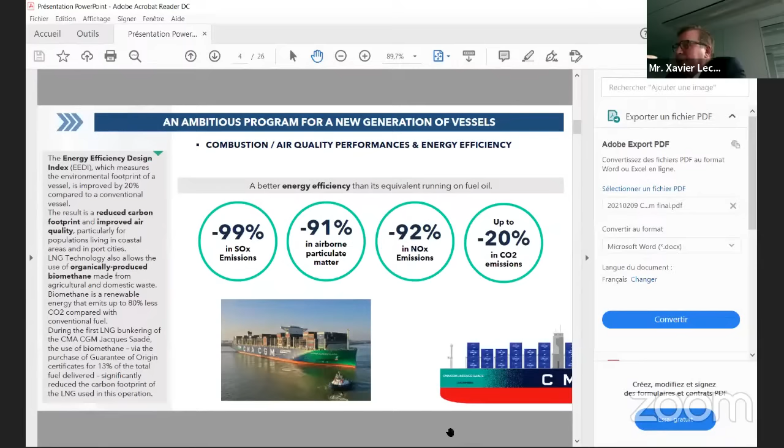The objective of the program was to reduce the impact of our activity by 20% on CO2, 92% on NOx, 91% on particulates, and 99% on SOx. We will see where we stand as we now have the first feedback in operation. This is quite an ambitious program, as you can see. We are close to half of it - there will be 26 ships in operation by 2022.

There's different types of ships - I will not go through the details of the characteristics. Just for you to know, there's a series of 1,400 TEU, a series of 14,000 TEU, and a series of 23,000 TEU. So far we have delivered 12 ships. There are 14 ships still under construction, which will be delivered through 2021 and 2022. At the end, we will have 26 vessels in operation in 2022, and there are 4 shipyards involved.

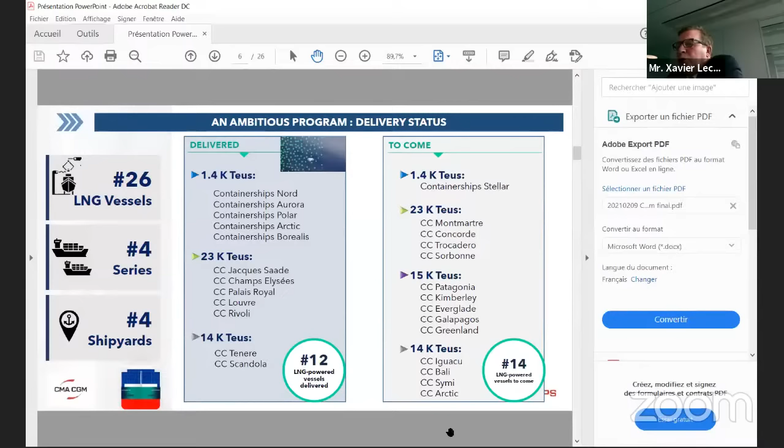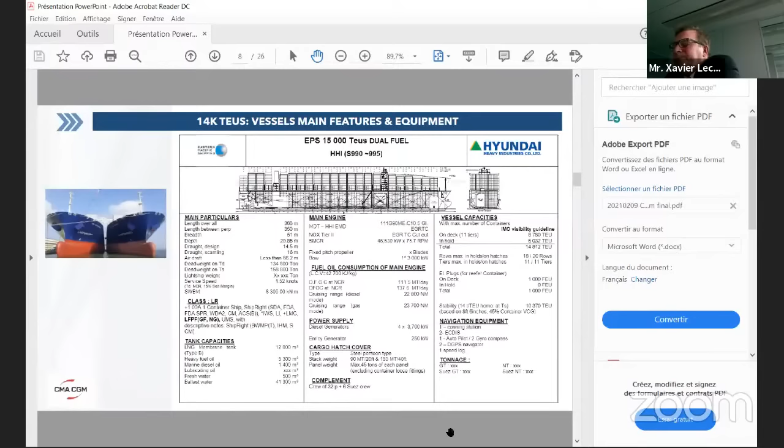I've put in, just for information for those who might be interested, the different characteristics - I will not go through all of them, just a few words. What is interesting about this program is we have most of the technology available on board. We have Type C, we have Type B, we have Mark III technology, and for the engine solution, the big players are all on this program: WinGD, MAN, and Wärtsilä. That gives us a good panel regarding the feedback I can share with you today.

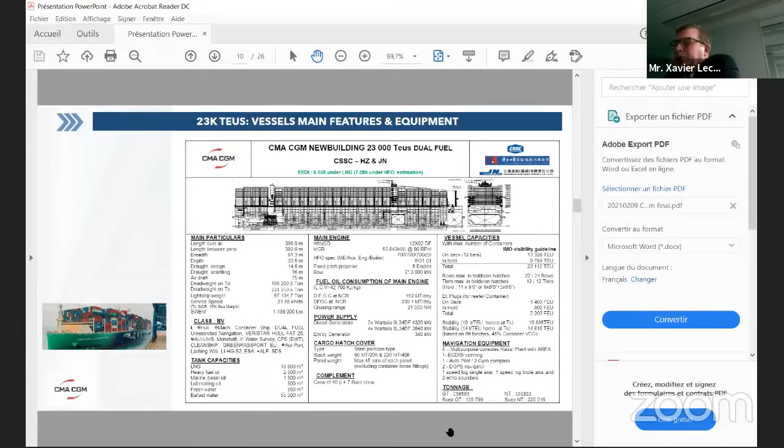We have all the solutions in operation, and of course we are measuring the performance of that program. If I stick to the main program, which is the 23K, the largest LNG-powered vessel ever built - this has been quite an extensive program of 7 years of research and development. Of course there were key partners, and I don't think we can solve the environmental problem without very large collaboration and international collaboration. That was the case on this program.

So I insist on the fact that the supply chain in this challenge we are all facing is really key. So in terms of results now, I think what is most important is where do we stand in results.

So if we look at the Energy Efficiency Design Index, on the 23K, we are reaching 6.32. And we feel that there are further improvements with alternators on the main shaft line. We can reach 6.09, 6.54 for the 15 DF K, and 16.41 on the 1,400 TEU. So we see that we already reach through that technology the

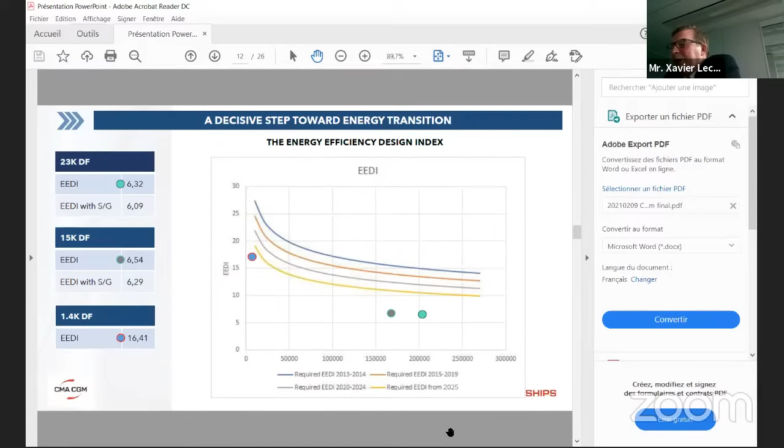So if we look at the pathway, as I mentioned, we've already reached with this delivery the 2030 objective. There's still a way to go to reach the -70, but again we feel that this technology has something like 15 to 20%, which is absolutely not the case of conventional fuel, and I think everyone would agree on that.

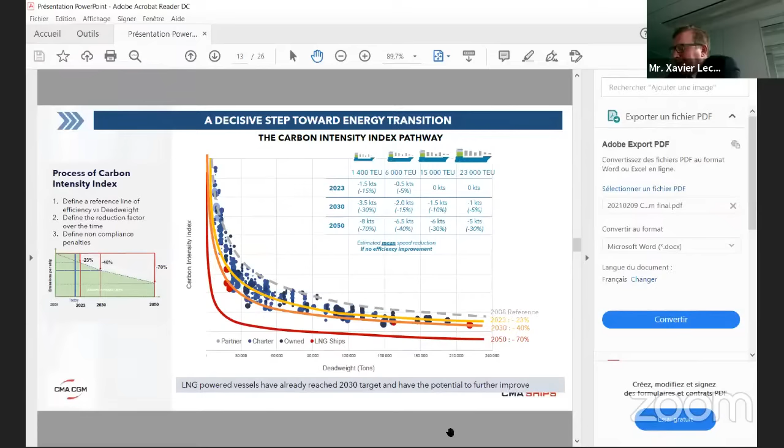So if we look at a very important point which has drawn the attention of all the shipping industry, it is of course the methane slip. I think we should not hide that with this technology there's a methane slip. So we've been measuring that, and what we reached so far is 2 grams of CH4 per kilowatt.

It's the same on an Otto cycle, or a diesel cycle, or very close by. And I think it's very important to measure it, to know where we stand in order to find solutions. And we already have solutions developed with our suppliers. We know what will be the design of the future series of ships to minimize it. And I think our objective is to completely eliminate the CH4.

But not only the technology on board the ship is important, I think the most important is also to work on the supply chain. And we know that the production of LNG is also something which could be further enhanced, not only the ships themselves. So I think we should work on both sides, and we know exactly where we stand on board the ships.

And I want to share in a very transparent way what we measure at this moment on board our ships. In terms of emission, this is quite spectacular, and I think our goal was to minimize CO2 by 20%. You can see in the figure here, which are measured figures on the first trip. The first trip is between Southeast Asia and Holland, where we do a full round trip, and at this moment we are getting 22 to 24% in consumption.

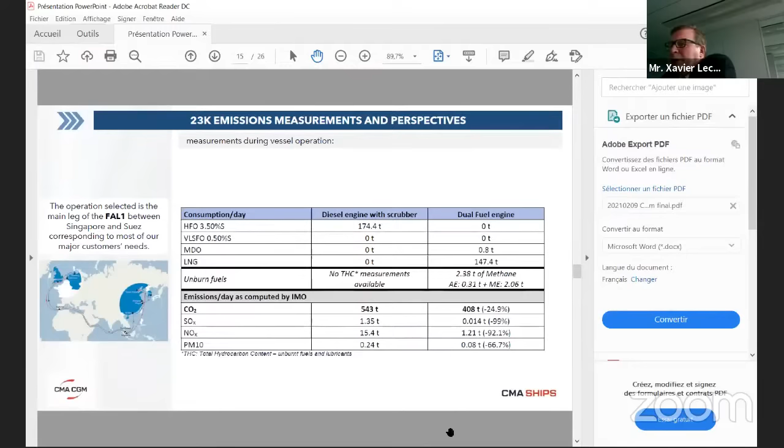If we look just at the figures in terms of consumption, these are real, measured figures, and again, this is available for the whole community. Again, it's quite spectacular. I mean, we are between 22 to 30% in terms of consumption, with of course immediate results on the emissions. So if we look now at the use rate, we have a good backlog now.

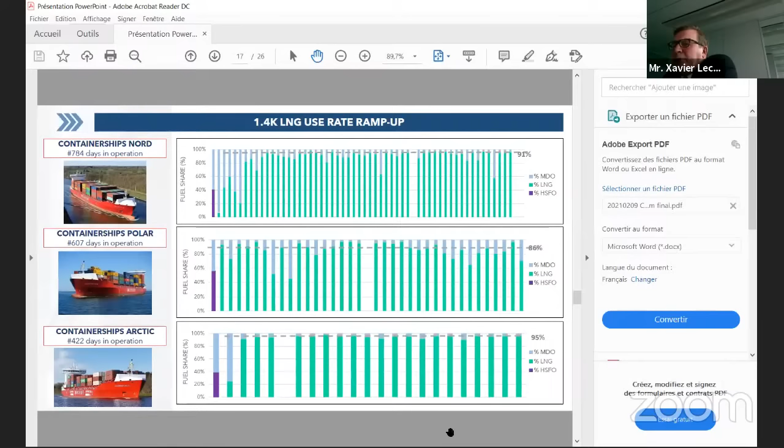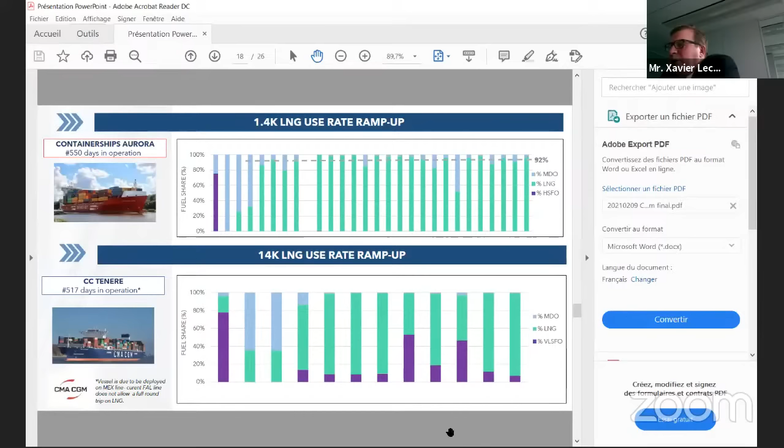784 days in operation for the very first ships. You can see that the use rate is around 91 to 95%. This is on the very first ships which we have operated. And then on the larger ships with our partner, the CC Tenere is not yet significant because she has been positioned, and I know that Mr. Ducot is online as well, on a line where the supply chain is not the best, but it will be solved within the end of the year, as there will be a barge located in Fos.

If we look at the big one, the very first leg we're under fuel because it was not possible to load LNG in China.

And with the very first legs we've done, we reached 96% of use with a very reliable operation on this extra large container ships.

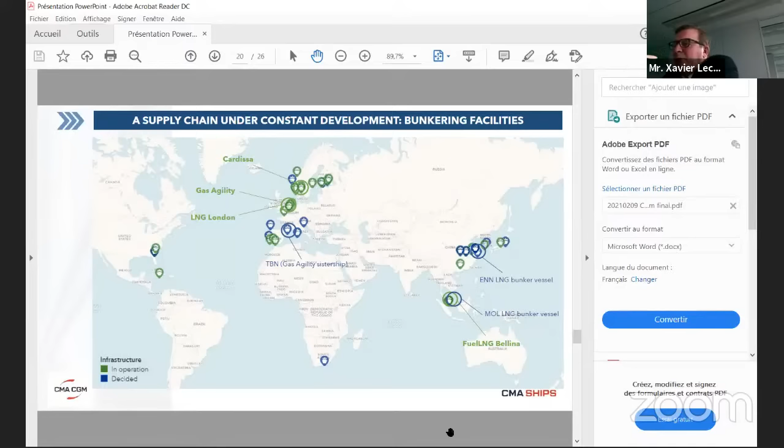Another very important point is the supply chain. We see that the supply chain is developing. The whole program was based on the supply done in Rotterdam with the partnership with Total and Rotterdam Harbour, which was a key partner during that program. We have already one possibility in Singapore now, and we are currently developing south of Europe and China. I feel we are not anymore in a chicken and egg story, as there are many projects of supply barges ongoing. There's 82 barges under construction at this moment. So the supply chain is definitely solved.

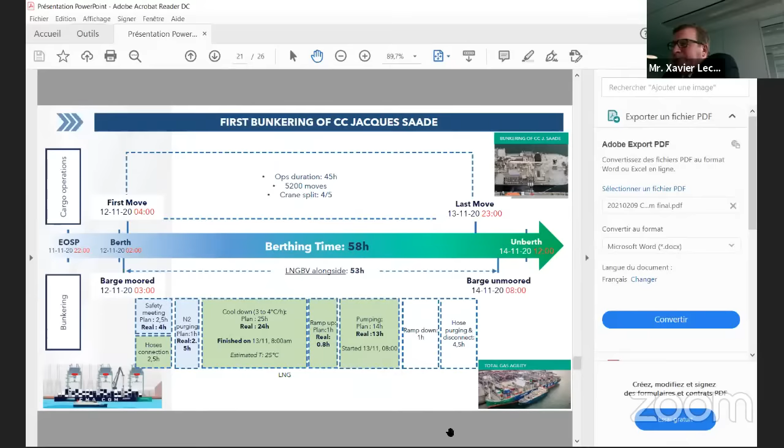If we look at just a few things, because there are many questions regarding bunkering operation: the very first bunkering operation took us 58 hours. Of course it was long, because the tank was not cold. Now we know that with a tank which is cold, it would take us less than 35 hours to bunker 18,600 cubic meters, with absolutely no impact on the operation, because at the same time we are loading and offloading containers. The only limitation we have in a restricted zone is with the reefers. So this is the progress we've been making.

Of course, we are learning on each bunkering. This was seen as a critical operation, and we feel that with the very first experience and the number of bunkerings we've done so far, 145, it's not an issue anymore.

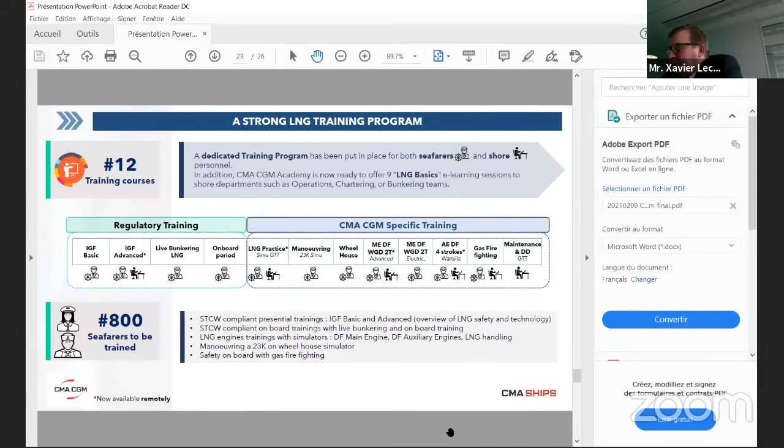Last but not least, the training program. We designed very specific training courses. We have to train 800 seafarers, and of course we have a dedicated training course on that. But this is quite something, and the training facilities for us have been a concern and still remain a concern. I think in Europe this should definitely be increased.

So the main challenges we have had: prototype. Like every prototype, we've been learning every day, but we've reached a point where we feel the operations are safe and reliable, and there's a good way still for improving performance in terms of emission and efficiency. Things like post-combustion, electric load sharing, aerodynamics, hydrodynamic design, heat recovery are still possible on this technology.

And we feel that for the next 20 years there's certainly a significant step towards energy transition. So as a conclusion, and I hope I've kept my 10 minutes, we've been in an innovative and ambitious program. We feel that LNG is an immediate, efficient step for the energy transition. The use rate is increasing daily. We feel there is potential for improvement compared to conventional solutions. Training is a challenge, and we'd like to make sure that in future rules the use of bio LNG will be taken into consideration, because we are already using 13% of what we load on board as bio sources. We definitely know the way will be long, but LNG is a significant step on that path. Thank you very much for your attention.

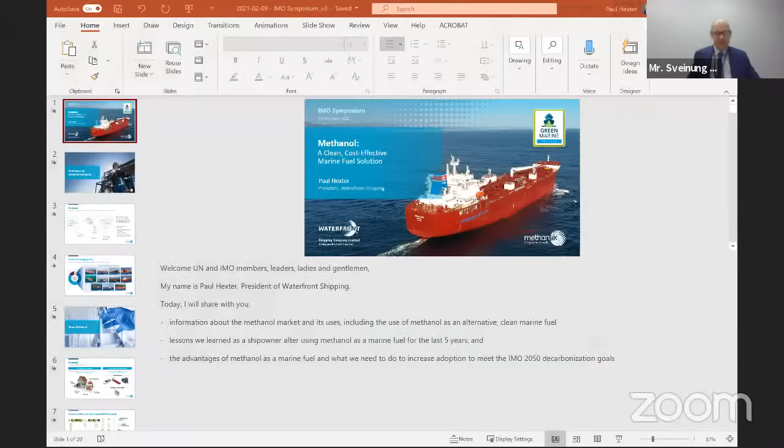Welcome UN and IMO members, leaders, ladies and gentlemen. My name is Paul Hexter, President of Waterfront Shipping. Today I'd like to share information about the methanol market, its uses, including as an alternative clean marine fuel. We'll share lessons learned as a ship owner using methanol as a marine fuel for the last 5 years, the advantages of methanol as a marine fuel, and what we need to do to increase adoption to meet the IMO 2050 decarbonization goals.

First, I'd like to share a little about Methanex Corporation. We're headquartered in Vancouver, Canada, with production sites in Canada, Chile, Egypt, New Zealand, the United States, and Trinidad. We're the world's largest producer and supplier of methanol, servicing growing demand around the globe. Methanol is one of the top traded chemicals globally, and has a well-established and far-reaching global supply chain in place today.

Waterfront Shipping, a wholly owned subsidiary of Methanex, is a global marine transportation company specializing in the safe, responsible, and reliable transportation of bulk chemicals and clean petroleum products to major international markets. Today we operate an extensive fleet of ocean tankers from 3,000 to 50,000 deadweight, forming a seamless network to move methanol around the globe. As at the end of 2020, we operate the world's largest methanol-powered fleet with 11 vessels, and have recently ordered a further 8, which by 2023 will increase our methanol representation to around 60% of our long-term fleet.

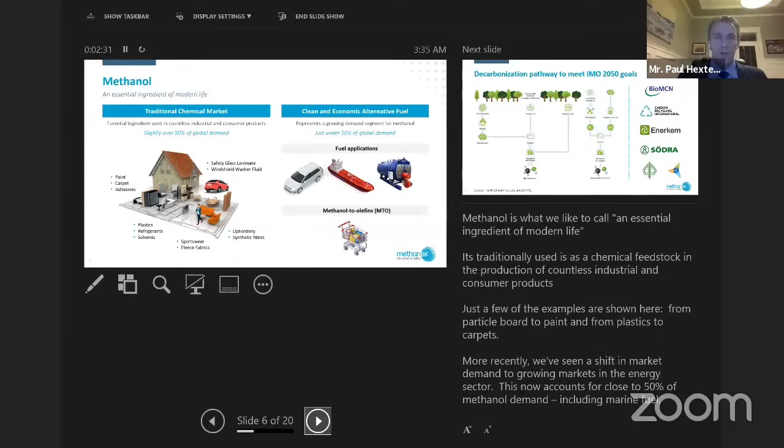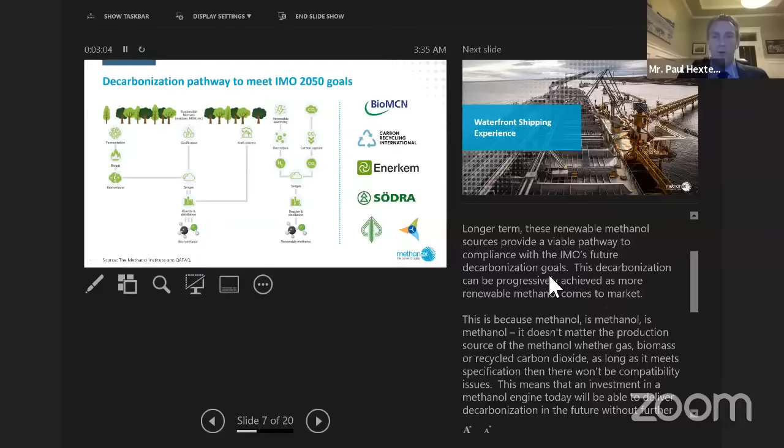Methanol is most commonly produced on a commercial scale from natural gas. However, it can be produced from many renewable sources, such as biomass, recycled carbon, and recycled carbon dioxide, and has the potential to significantly reduce well-to-propeller GHG emissions. Longer term, these renewable methanol sources provide a viable pathway to compliance with IMO's future decarbonization goals. This decarbonization can be progressively achieved as more renewable methanol comes to market.

This is because methanol is methanol is methanol. It doesn't matter the production source, whether gas, biomass, or recycled carbon dioxide. As long as it meets specification, there won't be any compatibility issues. This means an investment in a methanol engine today will enable you to deliver on decarbonization in the future without further investment. With growing awareness over climate change, more and more governments are encouraging renewable fuel production through incentives to make them more cost competitive with today's fuel.

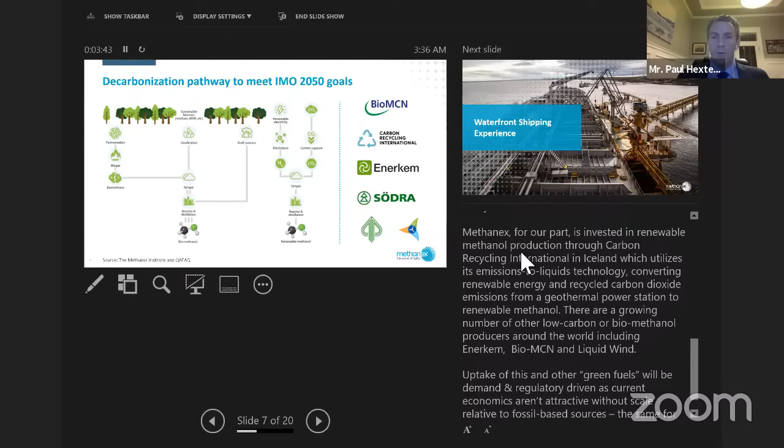Methanex, for our part, is investing in renewable methanol production through Carbon Recycling International in Iceland, which utilizes its emissions-to-liquid technology, converting renewable energy and recycled carbon dioxide emissions from a geothermal power station to renewable methanol. There are a growing number of other low carbon and biomethanol producers around the world today, including Enerkem, BioMCN, and Liquid Wind. The uptake of this and other green fuels will be demand and regulatory driven, as the current economics aren't attractive without scale relative to fossil-based sources. This is the same for all of the alternatives we're seeing, otherwise we'd be using them today.

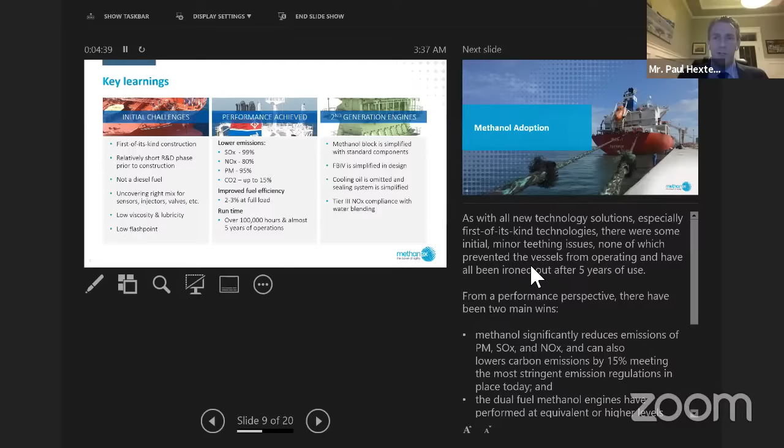From our experience, some key learnings: as with any new technology solutions, especially first of its kind technology, there were some initial minor teething issues, none of which prevented the vessels from operating, and they've been ironed out over the last 5 years.

From a vessel performance perspective, we've seen two main wins. Methanol significantly reduces emissions of particulate matter, SOx, and NOx, and can also lower carbon emissions by up to 15%, meeting the most stringent emissions regulations in place today. Also, the dual fuel methanol engines have performed at equivalent or higher levels than comparable diesel engines and have returned slightly better specific fuel oil consumption.

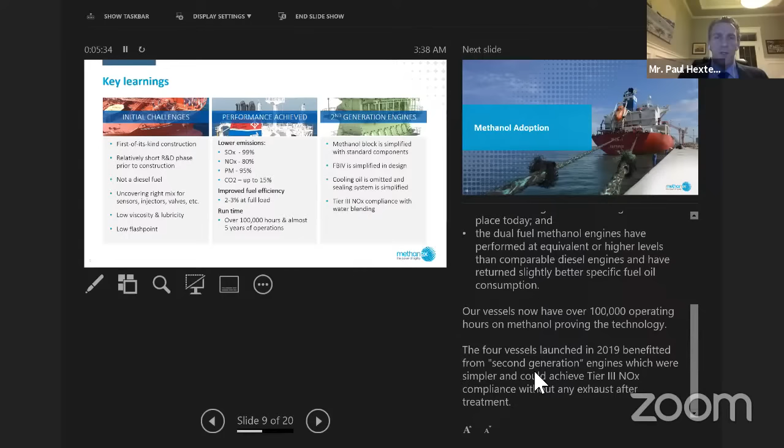Our vessels have now performed over 100,000 operating hours on methanol, proving that the technology works. The 4 vessels we launched in 2019 benefited from second generation engines, which were simpler and could achieve Tier 3 NOx compliance without exhaust after treatment.

Methanol is an attractive option for the shipping industry for a few key reasons. Something that can't be underestimated is the benefit of being a liquid fuel at ambient temperature and pressure. This makes safe handling of methanol similar to that of conventional fuels, and also means less modifications are required to the engines and fuel supply systems than gaseous or pressurized fuels. This translates to a lower cost with no need for expensive cryogenic or pressurized equipment.

This benefit also goes beyond the ship infrastructure, where existing diesel, landside storage, and bunkering facilities can easily be repurposed to accommodate the growing use of methanol. This helps complement the already existing global supply chain for methanol. Today, methanol is available in 88 of the world's top 100 ports and could easily be expanded to all ports by converting, at relatively low cost, existing diesel bunkering infrastructure.

The higher energy density of methanol relative to other alternative fuels such as ammonia or hydrogen also means less bunkering port calls, making methanol more attractive on longer routes.

Methanol flex fuel engines are now well proven with over 5 years of experience. The simple second generation flex fuel technology is essentially a traditional diesel combustion engine with a methanol add-on, which again minimizes conversion costs and keeps operational costs low. Minimizing conversion costs is aided by these new vessels meeting Tier 3 NOx regulations without the need for exhaust after treatment.

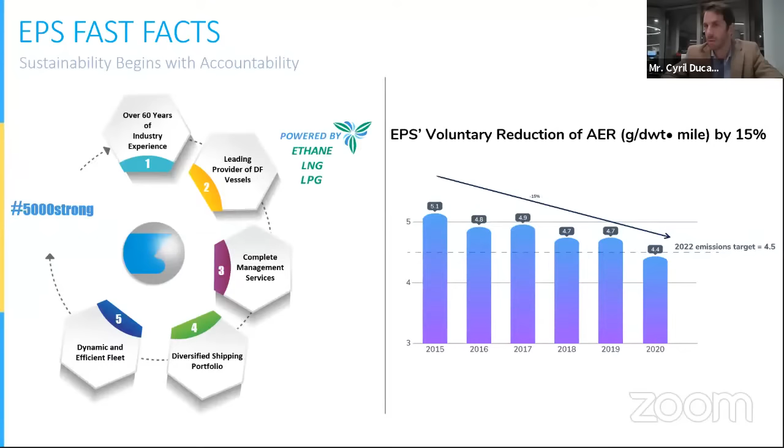So how did we do that, and how does biofuel fit in that picture? First of all, our rationale has been we should not let the perfect be the enemy of the good. There are ways today to reduce emissions, and as long as they are practical, technically, operationally, and commercially, we should use them. We look at the world of environmental actions as far as ship owners is concerned in three buckets. Solutions that help us handle existing vessels, legacy ships with engines that are 10 to 20 years old, and biofuel fits in that picture. They can be used on existing vessels, and they can reduce emissions of these vessels now.

Then we look at alternative fuels that are available today, that might not be perfect, that might not be zero carbon, that might have some trade-off, but there are a number of solutions like LNG that was presented by our partner CMA, LPG, methanol, ethane. There are fuels out there that prove to have a net improvement.

And then finally, we obviously spend a lot of time looking at alternatives for the future. Ammonia, hydrogen are strong contenders out there, and we always try to analyze the considerations we should look at as ship owners: weight, energy densities—these issues are question number one when we have to present these solutions to our partners.

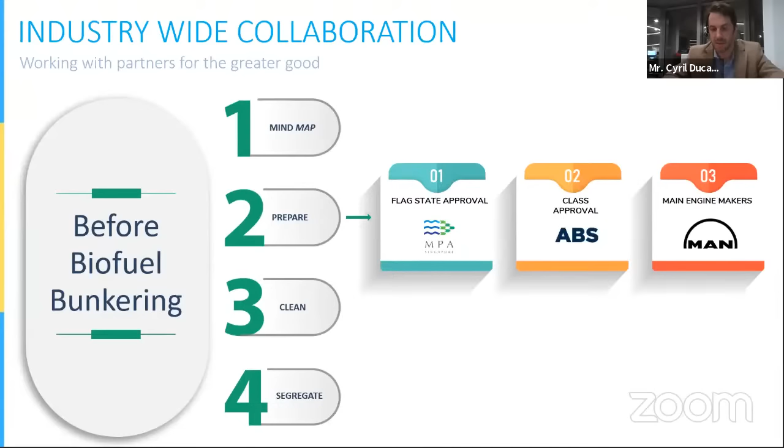Once we had all the procedures cleared, we had to physically prepare the vessel, clean the tanks, make sure that our fuel supply systems were compliant, that there would not be any risk of contamination. One thing I'm pleased to report here is that this was a very successful trial. The changeover from conventional fuels to biofuel was seamless.

The entire stem of biofuel was burnt without interruption over a period of 11 days, as we were doing a cross-Atlantic crossing. There was no operational issue to report.

Engine performance was good. I've listed here some of the physical properties of the biofuel compared to VLSFO, which was the alternative fuel for this specific ship, as well as the engine performance. The most technical of you will notice that the biofuel has lower viscosity, lower pour points, and about 10% lower calorific value compared to market standard VLSFO.

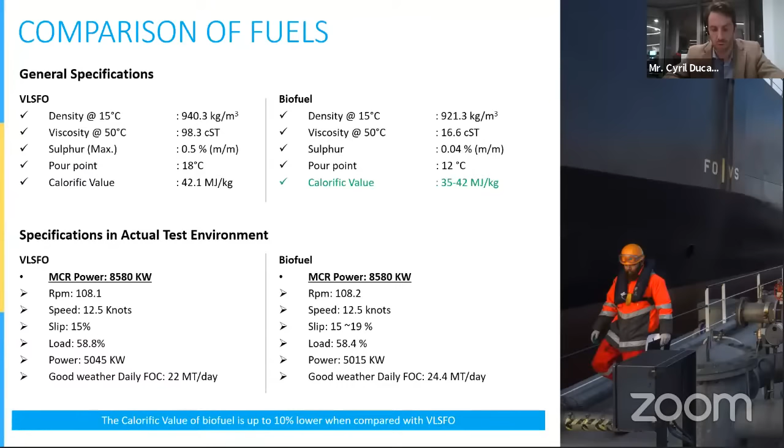As a result of that, the engine consumption was slightly higher by about 10%. But as far as the engineering was concerned, in terms of RPM, slip, load, power outputs, there was no noticeable difference worth noting here. So it was business as usual. In a nutshell, I'm very happy to say that it works.

For the total voyage, we still burned VLSFO on some of the auxiliary engines, but the net emissions were marginal compared to what we would have emitted otherwise. Putting here the AER ratio and the EEOI ratio impact, we went from 5 to 6 grams down to 0 on the main engine.

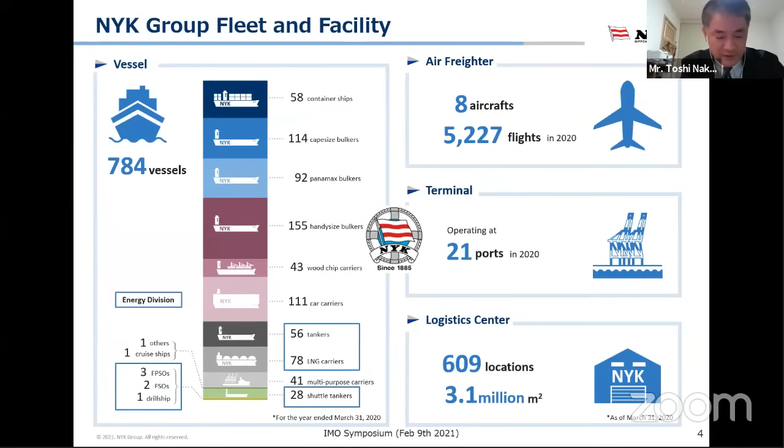Company introduction. This is the NYK Group fleet and facility, and this is just a key figure of NYK Group assets, and we will skip this slide since it is very obvious. On the next slide, this shows the background of establishment of the Green Business Group, which I belong to.

In 2018, we announced our midterm management plan called Staying Ahead 2022, with digitalization and green as key themes. We are promoting digitalization and green initiatives, making an effort to optimize the overall supply chain and create new value in the environmental field. Based on this plan, we established our new Green Business Group in April 2019. It covers new business relating to hydrogen and ammonia, offshore wind power generation, and LNG bunkering, which are closely related to each other.

Okay, let's move on to the next agenda. We will introduce our views on GHG reduction in shipping.

As you know, IMO set the GHG reduction target toward 2030, 2050, and 2100. In line with that, this slide is a future path released by Japanese Ministry of Land, Infrastructure, Transport and Tourism, titled as Roadmap to Zero Emission of International Shipping.

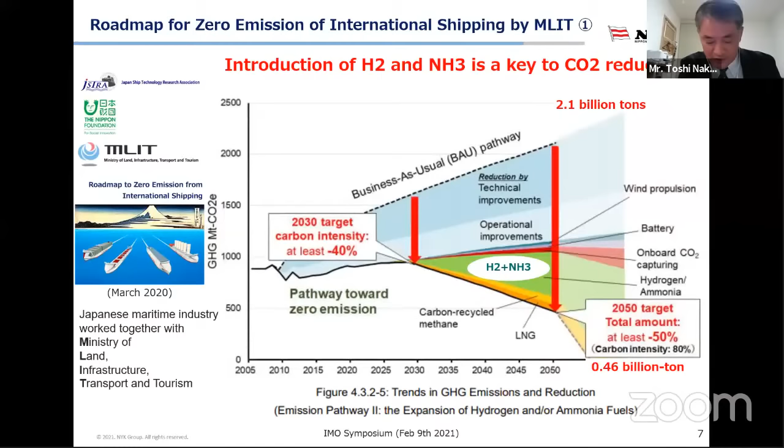They released it in March 2020 after discussion with Japanese maritime industries and research institutes. This roadmap shows that IMO's target by 2030 on fuel efficiency is expected to be achieved by technical and operational improvement. However, in order to achieve IMO's target by 2050, utilizing new marine fuels, including hydrogen and ammonia, is essential. More precisely, it is estimated ammonia or hydrogen will start to be used from the late 2020s and occupy 45% of all fuel consumption in shipping in 2050.

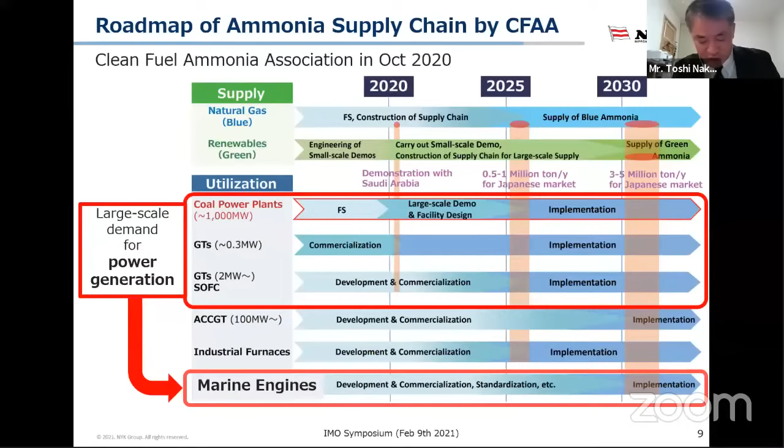On the demand side, this slide shows ammonia is estimated to be used as marine fuel widely in the 2030s, after it is used in the power generation sector in large scale, in the shape of co-combustion with coal and/or combined gas turbine cycle. Large-scale consumption in power generation will help the cost of ammonia be reduced and enable the shipping industry to start using it as marine fuel economically.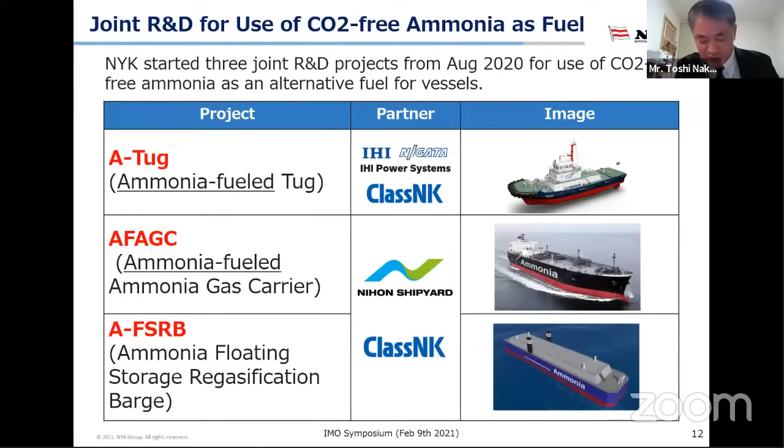In 2020, we launched three joint development R&D projects with our partners in relation to ammonia. Two of the three projects are development of ammonia fuel ships. One is the ammonia fuel tugboat, which we call A-Tug. The other is the ammonia fueled ammonia gas carrier, which we call AFAGC.

NYK, IHI Power System, and Class NK started the joint R&D project to put the world's first ammonia fueled tugboat into practical use. We are proceeding with R&D from both technical and operational aspects for the introduction of ammonia as a marine fuel for tugboats. We have been tackling themes such as the technological development of the hull, engine, and fuel supply system, and development of safety navigation methods. In fact, these three companies in the past worked together to jointly develop the LNG fueled tugboat named Sakigake.

She was built in 2015 as Japan's first ship fueled by LNG, which was bunkered from outside of the ship. In the A-Tug project, we will utilize the knowledge accumulated in the development, construction, and operation of Sakigake.

NYK Line, Nihon Shipyard, and Class NK are working on the joint R&D project for AFAGC. Large-scale marine transportation of ammonia is currently carried out by multi-purpose LPG carriers, but in this project we will be engaged in the R&D of a liquefied ammonia gas carrier. AFAGC shall use ammonia as a marine fuel, which is stored in cargo tanks.

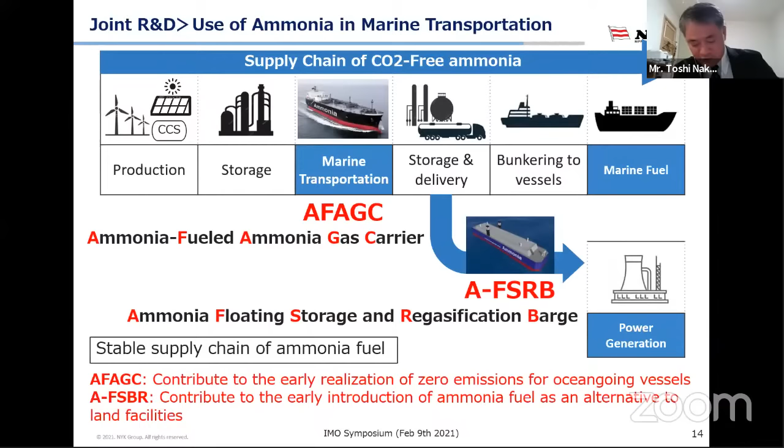This concept will contribute to the early realization of zero emission for ocean-going vessels because it can avoid the bunkering challenges, as we explain later. This joint R&D aims not only to utilize ammonia as a marine fuel, but also to establish methods for the mass transportation and supply of ammonia for introducing co-combustion with coal power plants operated by Japanese electric power companies.

Lastly, we will explain challenges to overcome in order to realize the concept of ammonia fuel vessels. We are now facing both technical and commercial challenges. On the technical side, we have three major challenges. One is how we can minimize pilot fuels considering fire retardancy of ammonia.

Second is how we can deal with NOx and N2O, which is recognized as about 300 times bigger GHG than CO2. Third, there is no proven and developed generator which can use ammonia as fuel. We need to develop it.

When it comes to the commercial challenges, we have four challenges. First, it should be higher cost as of now. Second, it needs more storage tank space because ammonia's energy density is about three times lower than HFO. However, it is a matter of judgment. What we think is more important is challenges in supply chain and safety.

We will explain this with additional slides lastly. Please take a look at this slide. We believe you can understand how long it took to escape from the situation of what we call chicken and egg, in the realization of LNG bunkering.

As you imagine, ship owners say, we cannot invest in an LNG fueled vessel without sufficient and reliable LNG supply by LNG bunkering vessels.

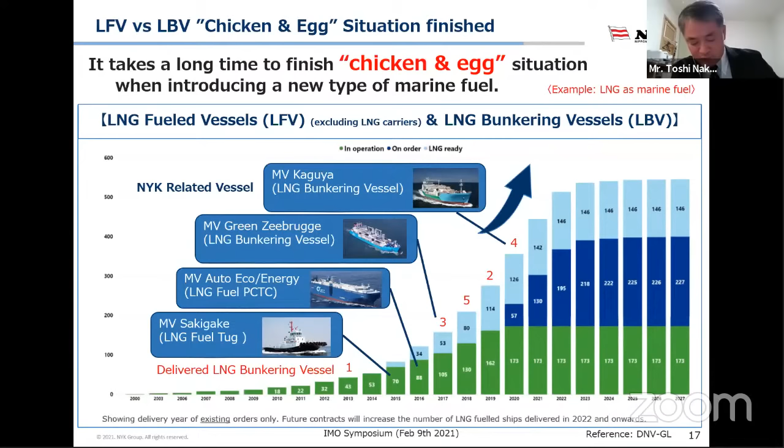On the other hand, bunker suppliers say they cannot invest in LBV without enough demand from LFV. It took more than 10 years, and the situation has almost ended. However, maybe 2 or 3 more years will be needed until such situation is completely finished.

This is the last point, safety. Ammonia is a toxic and corrosive material, so in order to build ammonia fuel vessels, we need to comply with safety regulations. What kind of regulations will be applied depends on the type of ship. If the ship is a liquefied gas carrier like AFAGC, the IGC code shall be applied, which means toxic fuel is not allowed to be used. So in principle, AFAGC cannot use ammonia fuel without amending IMO regulations.

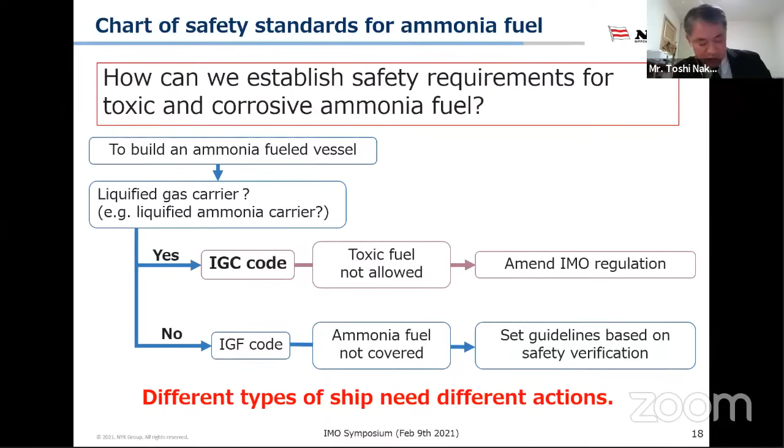If the ship is other type of ship than a liquefied gas carrier, the IGF code shall be applied. The IGF code mainly covers LNG fuel; ammonia fuel is not covered. We need to set guidelines based on safety verification. We will skip ahead to the last slide.

We proceed with our ammonia project in cooperation with the related Japanese government sector, MLIT, and the Japanese Classification Society, Class NK. However, it is finally necessary that we have international safety standards and rules for using ammonia as marine fuel to promote decarbonization widely in the shipping industry. Thank you very much for your attention.

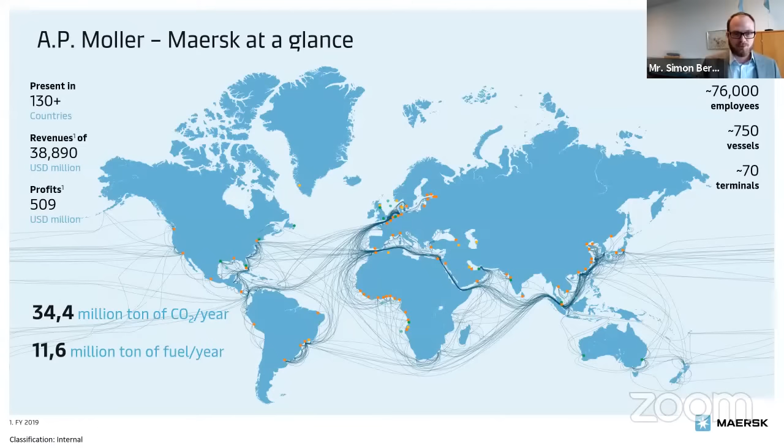Let me talk a little bit about Maersk and who we are. For those not familiar, we're a logistics and transport services company. We operate globally, with 70 terminals, and also operate over 750 vessels. That amount of vessels comes with a significant environmental footprint, as we consume 11.6 million tons of fuel a year as a company. That amount of fuel means we have a strong incentive to reduce our fuel consumption and our climate footprint. We've been active in this field for over a decade, culminating in 2018 with the decision at the highest level at Maersk to adopt our decarbonization strategy, aiming at net zero by 2050. That strategy also aimed to have a commercially viable net zero vessel on the seas before 2030.

In 2018, a lot of people came to us and were very interested in collaborating, and we thanked them for the strong interest. Another group of people said it was a moonshot that was not achievable. We are now 2 years later, and after hearing from the other speakers as well, I think we can all agree it's no longer a moonshot at all. Things have changed so quickly and so exponentially over the past 2 years that we internally at Maersk have to ask ourselves whether we don't need to accelerate our own strategy, as said by my CEO recently.

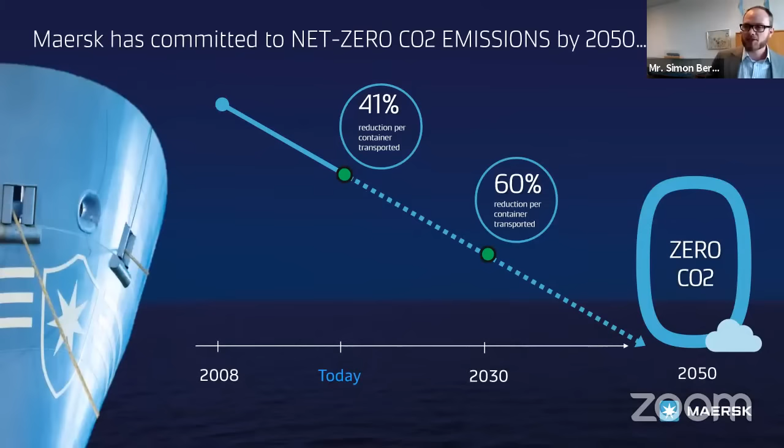So watch that space. The strategy we built was based on 4 core pillars. The first was the design of carbon neutral vessels. Honestly, after the work we put in over the past decade, we have to say the technical means of reducing CO2 emissions are drying out for container shipping, and it's really going to be about the new fuels. That's the second pillar of our strategy: to drive innovation in new fuels and ensure we have these new fuels for shipping.

We believe that the time of having one general fuel for shipping is over. We are likely to have a situation where we will have a number of different fuels. We don't know which one will be the silver bullet, or which ones will be the silver bullets. But what we know is that they're going to be far more expensive than the fuels we are sailing on today.

That's an important point I'll come back to in terms of pricing. I have to say it's also the first time I'm working as a governmental affairs specialist and actually advocating for a lot of research and R&D into another sector than mine. But it is true that most of the R&D will have to come from the fuel suppliers, as was also shown by the chicken and egg graph from the presenter just before me.

The third pillar that we have in our strategy is the one that touches on our customers. And that's actually one of the points that hasn't been touched on up until now in the discussions we've had here. But in order to be successful in our transition, we also need to make sure that we bring along our customers on this journey.

And the final pillar of our strategy is the one on regulatory affairs, and that's where the work of this organization is so hugely important. I'll come back to that in a later slide. I've also been asked to touch on our current priority fuel bets. And here they are — these are the four current priority fuel bets for Maersk.

As you'll see, and I touched on it, biodiesel is one of the ones we started with. It's been surprisingly good in the sense that the large vessels we've tried biofuels on, mixing up to 40-50% biofuels, have actually had no problems whatsoever in operating. So truly a very good drop-in fuel available now.

But the question mark here is, who gets it? Who gets the biodiesel? Which are the industries and sectors privileged to get those? We see today that there's a big fight for the biofuels. Our opinion is, of course, that the harder-to-abate sectors need to be the ones privileged and prioritized in getting these fuels. I think when it comes to road transport, for example, the pathway to decarbonization is a lot clearer than when it comes to aviation and shipping.

Our second bet is methanol, and a very interesting presentation as well by Mr. Hexter. As shown already in operations, it's safe to use, no need for refrigeration, but we do have a question around the scalability of this fuel, and around its production, which relies on recycled carbon or carbon capture, and there's a need for progress there. But again, as things are moving exponentially, it will happen.

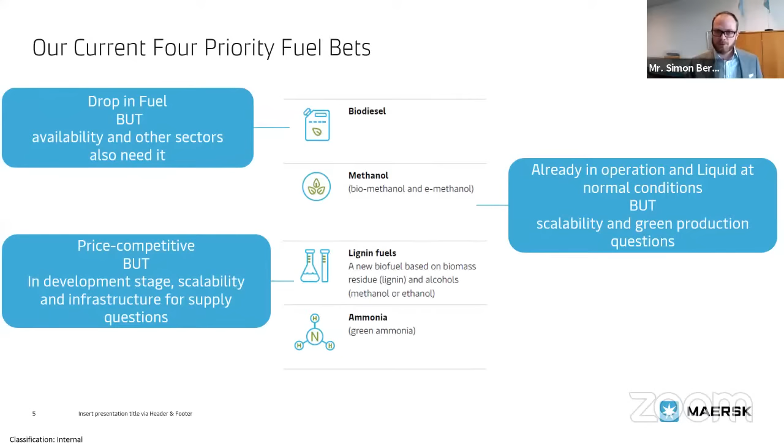Our third bet is what we call lignin fuels, a new biofuel we're working on with a number of partners, where we use a residue from biomass from the pulp and paper industry called lignin, which today is really a waste product, and mix it into an alcohol-based fuel. This would actually lower the price of the alcohol-based fuel substantially, and we would have a price-competitive fuel. It's still in development stages. It's promising — we still have questions on scalability and infrastructure, but it's one we firmly believe can deliver. And the last one is ammonia.

Ammonia is the only fully zero emission fuel we have on our fuel bet, because it doesn't have a carbon molecule. But there are questions around safety, toxicity, and infrastructure. There are also questions, raised by other panelists, about the need for seafarers to be trained extensively to handle this. Training on LNG is one thing, training on ammonia would be completely different. And we're dependent on the maturity of electrolyzer technology, but to be fair, that's also true for some of our other fuel bets.

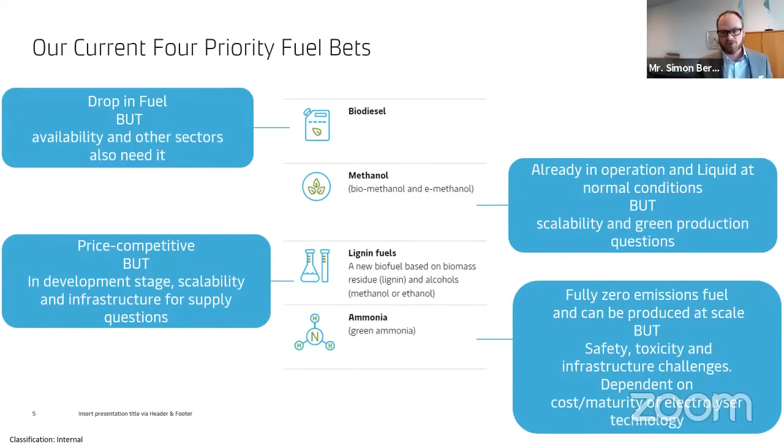So this is a quick review of what we are focusing on as Maersk now. This is my last slide, on the regulatory challenges, and I think you've heard this from other panelists today too.

We really need action now. There's no doubt for Maersk that 2021 will be an absolute key year for the IMO. We know and hope the IMO will deliver substantial progress in 2021 on the 2018 strategy adopted at IMO. IMO really needs to leapfrog. It needs to demonstrate leadership and open up the difficult discussion. We have to stop talking about shaving a percentage off here, and really start looking into transition.

We have closed, or are close to closing, the short-term measures from last year. We still have some work there, but let's look forward a little further. We need to secure the RD&D. Deployment is very important here - what we're talking about is no longer support for CAPEX, but support for OPEX.

The industry's IMRB proposal would be a very good litmus test for the organization, to see whether it can be agreed upon and help push these new fuels into the market, closing the competitiveness gap between different types of fuels. And we need to start looking at market-based measures.

I know this is a big one, a difficult discussion, but if we want a chance to actually have a market-based measure in place by the end of this decade, we have to start opening up that discussion now, because it's going to take time. It needs to be future-proof, solid enough to withstand high ambitions in 2023, but also the whole life cycle assessment discussion we need to have.

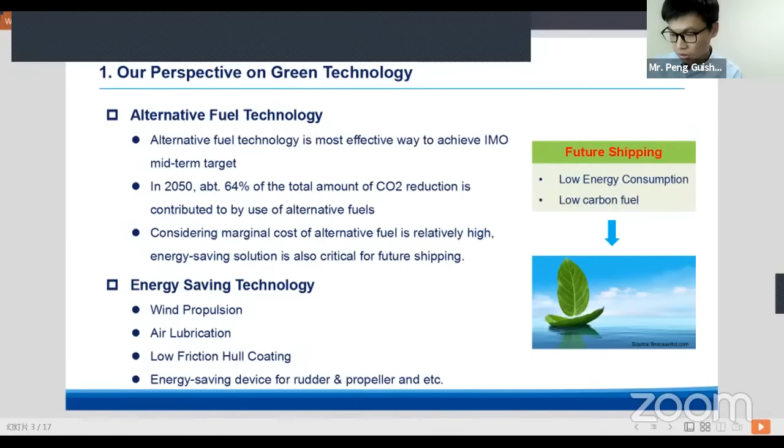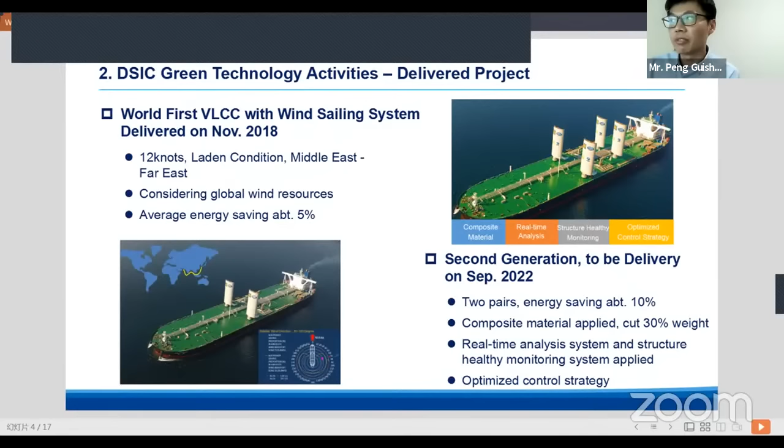In this view, our shipyard, Dalian Shipbuilding Industry Company of CSSC, has been making efforts as follows. In 2018, we delivered the world's first aerofoil-assisted VLCC, and the second generation aerofoil-assisted VLCC under construction will be delivered next year.

We have been exploring the application of air lubrication on VLCC with partners for several years. Now the air layer drag reduction system will be installed on one of our on-hand orders and is planned to be delivered in 2023.

And for alternative fuel, the world's first LNG fueled VLCC reaching EEDI phase 3 will be delivered this year by our shipyard.

Together with MAN Energy Solutions and Lloyd's Register, DSIC started to explore zero carbon solutions with ammonia as fuel since 2019. The aim of the JDP is to develop a zero carbon 23,000 TEU container vessel. The AIP was granted by Lloyd's Register in the same year at the Maritime exhibition hosted in Shanghai. Last year, the design was further developed with more engineering details.

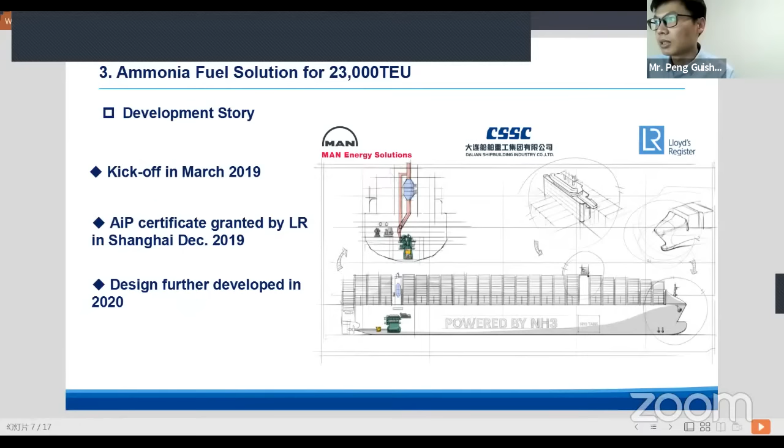The pre-study before starting the JDP was to choose an alternative fuel, taking into account many aspects: environmental performance, fuel flexibility, fuel availability, infrastructure, production flexibility, safety, and so on. We found ammonia the closest alternative to an ideal fuel. As also said by the IEA, ammonia as fuel is the most promising solution.

The MAN dual fuel engine LGIP was adopted as the main engine. The heat ratio of ammonia is more than 90% at each loading during operation. Combined with pilot fuel using biodiesel, zero carbon emission can be realized. We also look forward to using a catalyst to crack a small portion of ammonia into nitrogen and hydrogen, then the pure hydrogen ignites and burns with the ammonia.

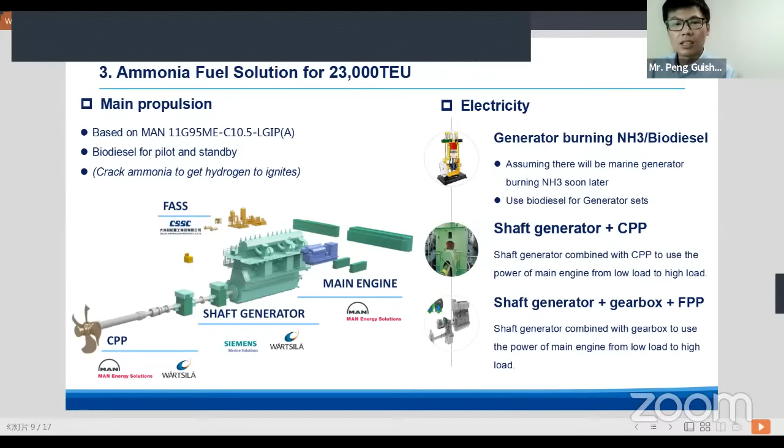For electricity, we assume there will be, and I think there must be, marine generators burning ammonia soon. For now, a shaft generator with suitable propeller configuration can be a solution. MAN, Wärtsilä, and Siemens have confirmed the availability of this kind of equipment.

We know that ammonia fuel requires larger tank space than LNG. By weighing various factors - multiple refueling, maximum container intake, cost efficiency, suitable operation speed - the fuel tank capacity is finally decided to be 19,500 cubic meters. It satisfies a single trip endurance at the speed of 20.5 knots.

Together with the 3,200 cubic meter biodiesel tank, the vessel can also sail at higher speed for a single route or lower speed for a round route.

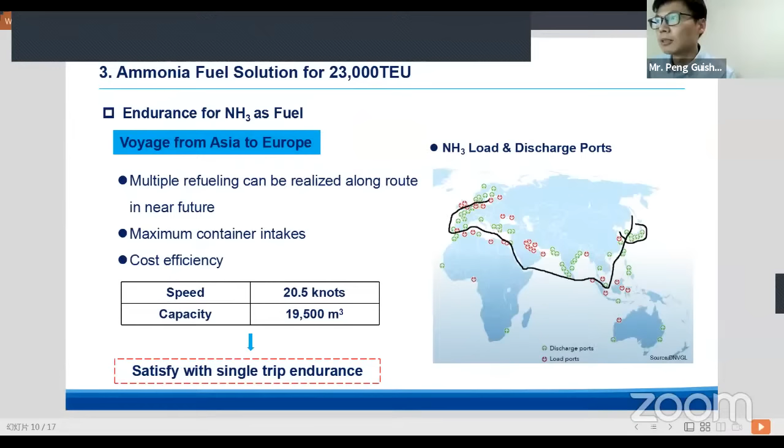In terms of the storage tank, IMO Type A, Type B, Type C, and membrane storage tanks are investigated. For this vessel, we conclude that the IMO Type A tank is quite suitable because of the following advantages: it has high capacity efficiency, is suitable for minus 34-degree design temperature, low cost, and has been widely used on LPG tankers.

The fuel supply system is similar to that of LNG fuel and also has its own unique features. The liquid ammonia in the storage tank will be pressurized by a low pressure pump and then a high pressure pump to 70 bar, heated to 25 to 55 Celsius degrees using water glycol as the heating medium, and then goes into the engine through the valve train.

BOG from the ammonia storage tank will be reliquefied. A series of safety measures are considered for ammonia fuel system operation, especially considering the toxicity, the low temperature storage, corrosion, and explosion.

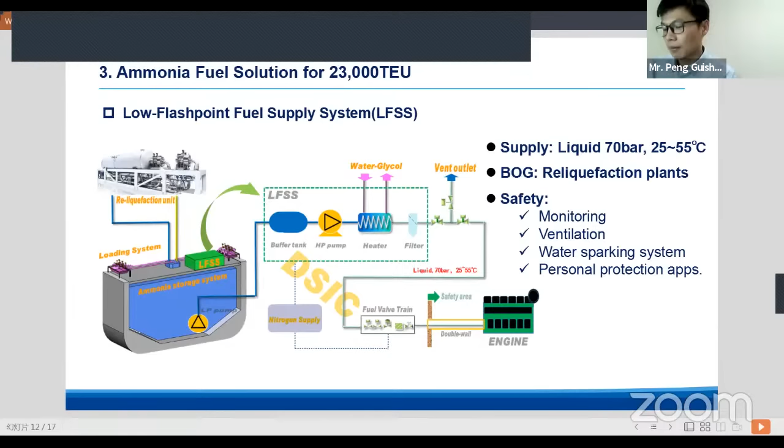Moving to the arrangement of the low flash point fuel supply system: the ammonia tank and bunker station is arranged directly under the accommodation area to minimize container intake loss. The liquefaction unit is located in a separated room close to the tank dome room on the second deck. A separated fuel supply room is arranged beside the engine room to optimize the fuel system configuration and reduce safety risks. Double wall piping and ventilation systems are applied for the fuel piping from the fuel tank to the main engine.

Two vent masts are located at the forward and aft parts. The forward one is for the bunkering stations, tank, and liquefaction units, and the aft one is for the fuel supply system and the main engine.

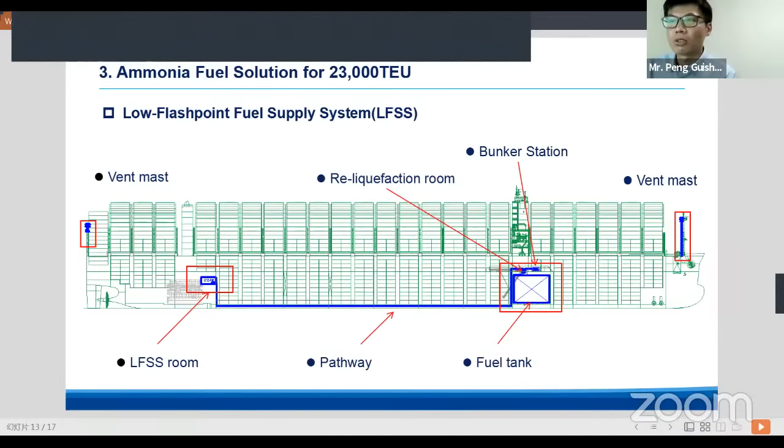Okay, thank you. Regarding the cost that the market cares most about, based on our investigation, the capex gap between LNG fuel and ammonia fuel is about 9 million dollars. The cost of the storage tank and the fuel gas supply system contributes the most. The OPEX is still weak right now because of the uncertainties of fuel price and the carbon tax.

We still have some perspective on the uncertainty of using ammonia as fuel, but I think all these aspects have been talked about by the guests of the last panel. So I'd like to finish my slides. Thank you, Chairman, thank you all. Thank you very much for a very interesting presentation, which is very specific in relation to what you are doing, and it will be very interesting to follow your success further.

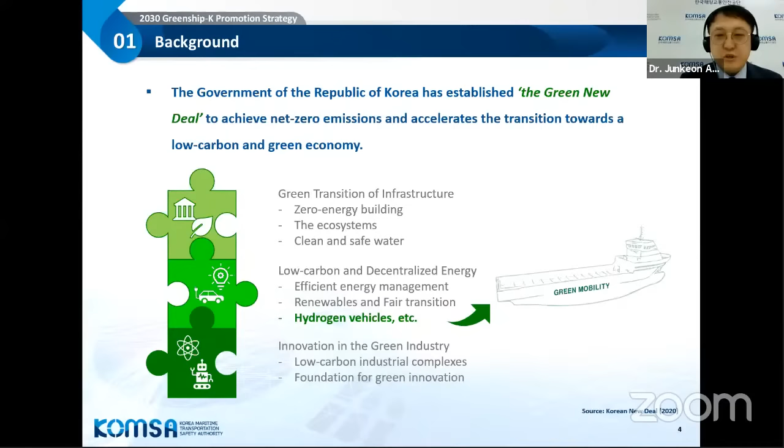According to the national plan, the South Korean government decided to invest 870 million dollars for the innovative R&D program of green ship technologies over a decade, starting last December. The government also proceeded with the Green New Deal to achieve net zero emissions for a sustainable future. One of the promising strategies is to use green mobility on the road, at sea, and in the sky.

We have three core goals about green ship technology: carbon-free, low carbon, and localization of existing technologies. In the first step, we are going to improve low carbon technology like LNG, mixed fuel, and energy saving as bridge technology. After that, carbon-free technology will mature for the shipping industry.

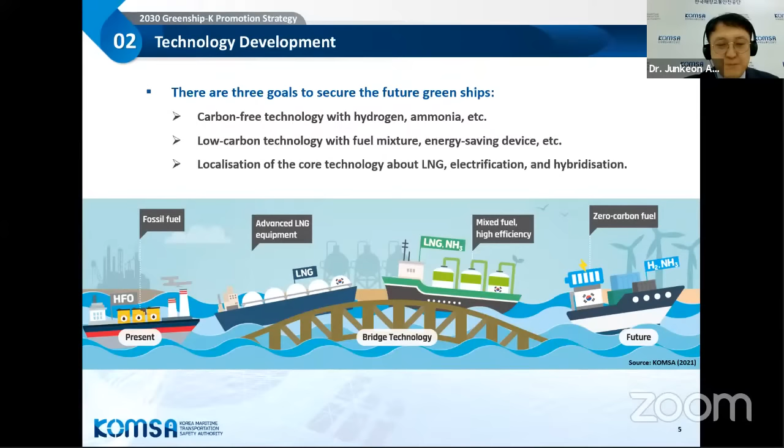We are planning to reach the global standard by using R&D products. Onshore testing facilities will verify new technology like green fuels, electrification, cryogenic service, new hull forms, etc.

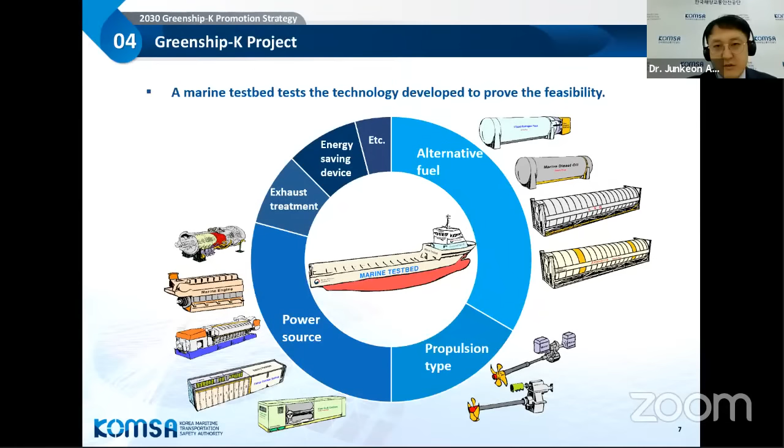This slide is the key point of the Green Ship K promotion strategy. We will build a marine test bed to prove the technical feasibility. We may have successful combinations of green fuel, power machinery, propulsion type, etc. during the R&D process. A marine test bed will give you trust in terms of the safety as well as reliability of the Green Ship K technology.

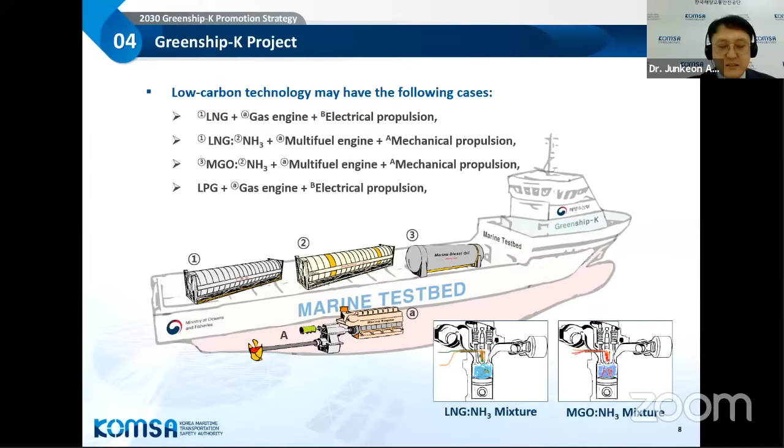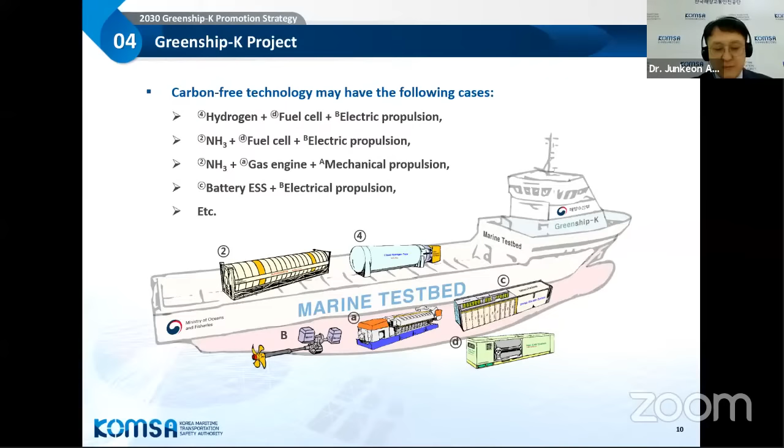The Republic of Korea will build a green fuel supply chain. LNG bunkering capability will grow up to 1.4 million tons per year in 2030. Ship-to-ship bunkering, as well as terminal-to-ship bunkering systems, will be established in the major ports in South Korea. An alternative maritime power system will be installed for fully electric ships, step by step. Carbon-free fuels are also available from small-scale supply to large-scale bunkering.

For market activation, the government-owned ships should be converted into green ships. New ships will be built with eco-friendly technology, while existing ships in service will adopt exhaust cleaning technology. The government facilitates the green ship ecosystem by using Green New Deal funds, incentives, and tax reduction.

By 2030, we will have 528 green ships around the seas of the Korean Peninsula.

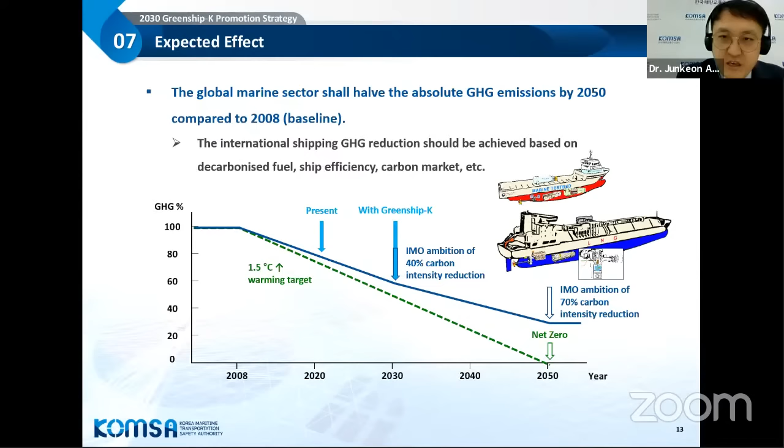The IMO has a rigorous philosophy of greenhouse gas reduction. We have to cut off 50% of carbon dioxide in global shipping. I believe the Green Ship K strategy will make a great contribution toward sustainable marine sectors through decarbonization. Please keep in mind, the Green Ship K becomes with you. Thank you very much for your attention. Let me finish my presentation here.

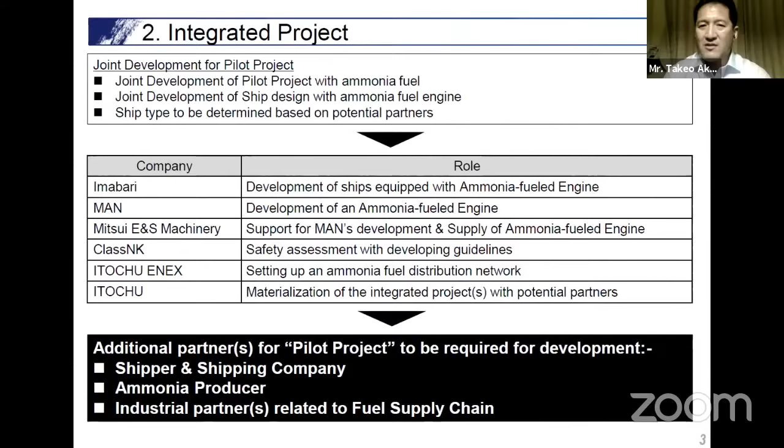For this particular project, everybody pointed out the chicken and egg problem. We agree, and in order to develop this kind of project, the most important issue is to make a partnership in each industry. So that is our role.

As you can see in this image, we are working with manufacturers in the shipbuilding industries, but we also need to discuss with shipping companies, shippers and users, bunkering side, and fuel supply side producers. Therefore, throughout the year 2020, we made many presentations to many potential partners in each industry.

Now we have a number of partners who showed interest in our development. For the bunkering side, we set up a partnership in Singapore, and the Singapore government has started to study the ammonia bunkering safety issue. Therefore, we also tied up with Nanyang Technological University, which is conducting a study on that. In Japan as well, we set up a similar partnership, and we will have this kind of discussion there too.

As to our partners at the shipyard side in Japan, last month, January 2021, Imabari made a joint venture with JMU, the second biggest shipyard in Japan, for design, making, and sales promotion for all commercial vessels. Therefore, from 2021, our shipyard partner is Nihon Shipyard.

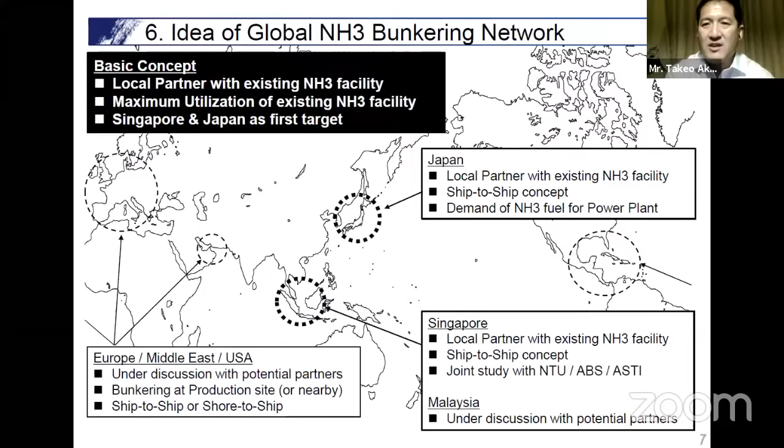That is a very important concept, because we don't need to make a new investment to install ammonia infrastructure from scratch, since we have a lot of facilities already. So that is our concept.

Then the target for ammonia procurement. Through our discussions, we found that we can take current specifications without substantial modifications, but of course subject to further study. One of the biggest issues is how to supply better ammonia, because at the time of production, everybody understands that ammonia has CO2 emissions.

Therefore, we set up a benchmark. We try to supply ammonia with net CO2 emissions of less than 1 CO2 ton against the production of 1 ammonia ton. So that is a kind of benchmark. Of course, in the future, once we have green ammonia, we can take green ammonia as a blend, or maybe 100% green ammonia in the future. So that is the idea.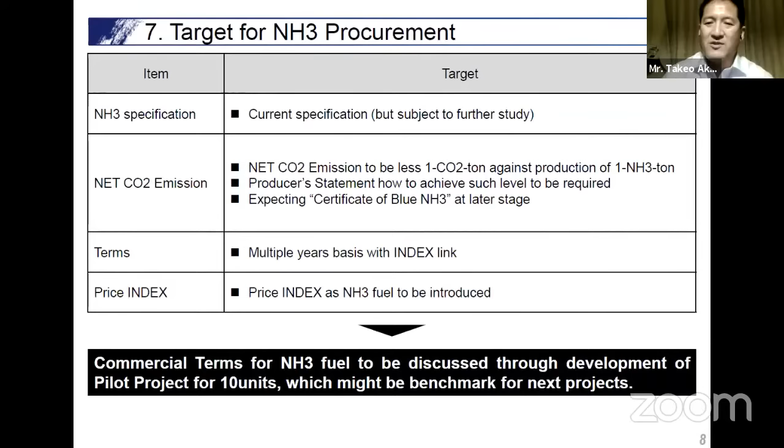But of course, as to the commercial terms, today we don't have any commercial terms for ammonia as a fuel. Therefore, we need to discuss with all parties what should be the price index. But of course, that is a matter of discussion at the time of the commercial pilot project.

Lastly, for regulations, we understand that cost and regulation is key for decarbonization in the shipping industry. Of course, first of all, we need safety rules, but in order for us to encourage shippers to go ahead, we need a clearer picture.

First is emission control. Of course, IMO is now under discussion about EEDI, EEXI, CII, not only for new buildings but also for existing vessels. But we'd like to have a clearer picture, a long-term plan, including rules and regulations. Otherwise, the ship owner cannot set up their long-term plan of fleet replacement. Also, we understand there's a question of how we should make a linkage with the country's responsibility to confirm how it works. So I think that is one issue: how to set up a guideline as an IMO.

The second is the more commercial side: how we should encourage or convince end users to go ahead with this kind of project. So we definitely need an incentive. Of course, we understand we need a fund.

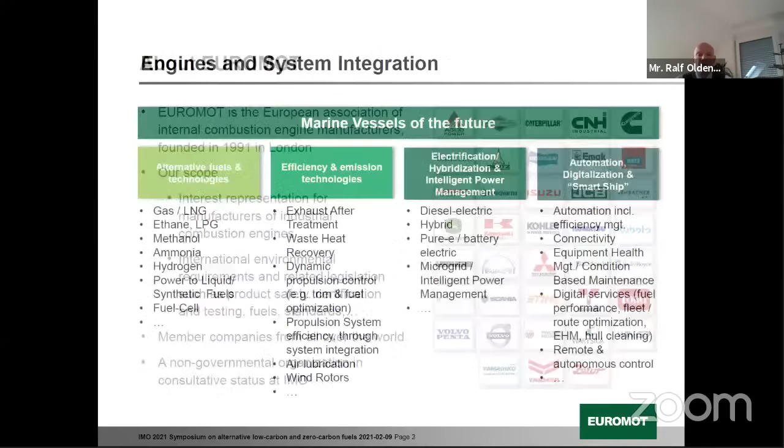Next slide, please. Development of marine technology can be split into several pillars, as shown here on the screen. You can see alternative fuels and technologies, basically the focus of the symposium today and tomorrow. Efficiency and emission technologies, electrification and hybridization, and automatization and digitalization under the name of smart ship.

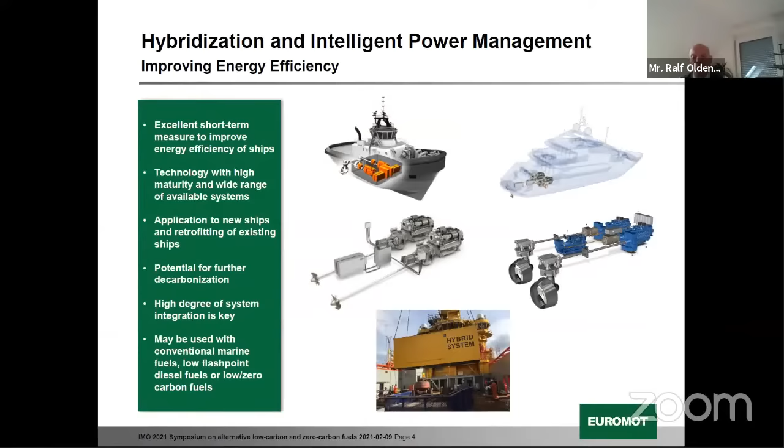Next slide, please. This brings us to hybridization and intelligent power management systems, which are very effective short-term measures to improve ships' efficiency. As illustrated, systems are available for a broad range of applications. Ship owners and operators can rely on the high maturity and robustness of technologies. The systems provide further potential for reducing greenhouse gas emissions in a short-term perspective and are also future-proof on a medium and long-term perspective in combination with low and zero carbon fuels. There will be no stranded assets due to this. Systems are available for both new build ships and retrofitting of existing ships. The pictures provide an overview of systems integrating engines with power take-off, power take-in, battery systems, and power control units on different ship types. Other combinations with energy converters are possible. Fuel flexibility is provided. Next slide, please.

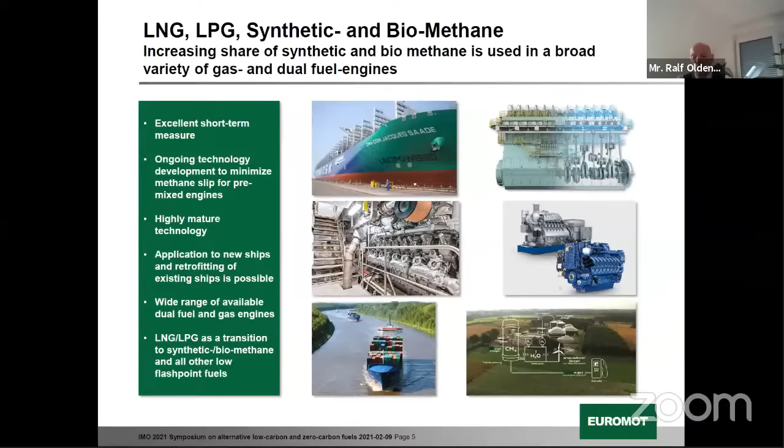This slide shows the state-of-the-art LNG and LPG engines as used increasingly in marine applications. The technology is very mature and engines are available as dual fuel engines and gas engines for new builds or as retrofit solutions. LNG provides a superb energy density, in fact the highest per mass of current marine fuels. In combination with a carbon content lower than fossil liquid fuels, LNG provides a substantial CO2 reduction. Lean burn dual fuel and gas engines are very efficient energy converters with high mechanical efficiency. Some methane is passed, however, through the conversion process of premixed engines. A considerable reduction of the slip has been demonstrated in recent years, with further improvement to be achieved in the upcoming years. Using LNG or LPG provides an overall greenhouse gas reduction. With no or very minor adjustments, synthetic methane or biomethane may be used in engines. Further greenhouse gas reduction potential on a medium-term and long-term context can be achieved in this way. There are no stranded assets by using dual fuel or gas engine technologies. The pictures show examples for LNG use in engines of different sizes and ship types and the real-life production scheme of synthetic methane. Next slide, please.

Hydrogen is the basis for energy conversion processes and the building block of all addressed fuels. Engine manufacturers are considering the use of hydrogen as fuel directly injected in marine engines. As a first step, concepts of admixture of hydrogen to other fuels, for example LNG, are currently being developed. Engines operating with pure hydrogen are on the roadmap as a further step.

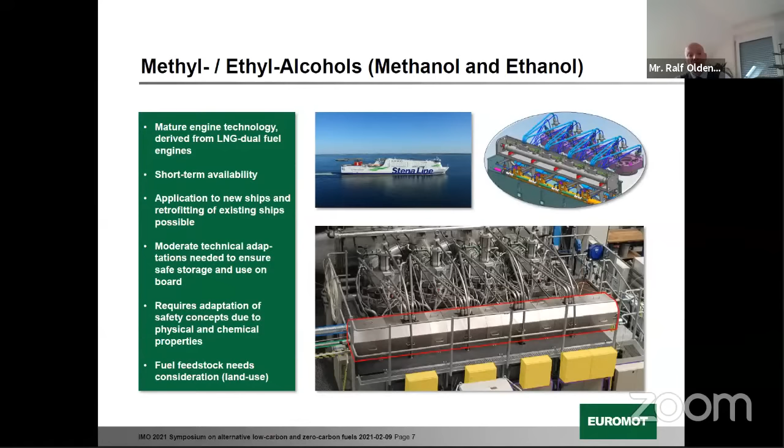Another fuel under consideration is ammonia. Engine technology development is currently ongoing, and engines can be expected to be available on the market in the coming years for both new ships and as retrofit options for existing ships. Its energy content qualifies ammonia as marine fuel. As it does not contain any carbon, ammonia is an attractive alternative marine fuel option.

However, nitrogen oxide and nitrous oxide emissions need to be taken into consideration. Where needed, exhaust after-treatment systems have to be adapted. There are moderate additional efforts required for handling and storage. Ammonia's toxicity must be adequately addressed in the engines and overall safety concepts for storage and transfer on board. The picture illustrates examples of engine technology under development and a possible roadmap.

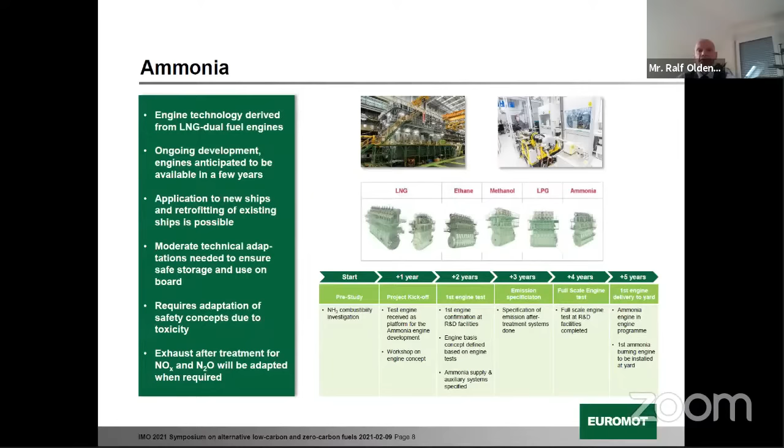This brings us to slide 9. In this slide is a summary included which addresses our key issues and the most relevant prerequisites from engine manufacturers' perspective. As you can see, the combustion engines combine an outstanding endurance with high energy density, which is key as well for the use of future marine fuels, and which has been addressed already during further presentations. This is, of course, key.

The IMO, MSC, and CCC subcommittees need to speed up the development of the IGF code. And we are of the view that more resources need to be provided, especially to the CCC committee. As mentioned before, we have to make sure that in a short time frame, the presented fuel options can be included in the IGF code, in guidelines which are associated to the code.

Regulations have to be developed in a technology neutral way under consideration of state-of-the-art risk assessments. This is important to assure a broad technology which can be brought to the market and which can be developed in the future.

Greenhouse gas intensity of fuels has to be considered in a well-to-wake approach. The future share of presented fuel options is at the time being unpredictable, even to us as engine manufacturers. Therefore, manufacturers are advancing the development of engine technology and systems for all presented fuel options. And finally, the sustainability of production of marine fuels, reliable supply to ships, and affordable prices is a challenge of the maritime energy transition from our perspective.

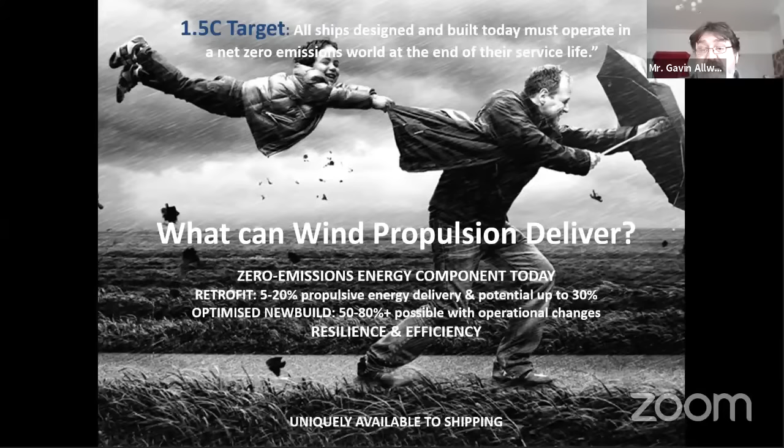So very quickly talking about that direct application of wind power - we're talking, it's a primary renewable energy. Now, if this was actually a fuel that I was talking about in the commoditized burning fuel aspect, if I was to tell you that it was abundant, available all around the world today, delivered onto your ship at the point of use with no storage and no cost for the lifetime of the vessel, with no new infrastructure on land, I think the industry would generally be biting my hand off to deliver this fuel.

But with wind propulsion, we've had some perception issues, and there are also some challenges technologically. But those are developing. We don't see this as a competition to secondary renewables, such as hydrogen, ammonia, etc. We actually see it very much as complementary. And the next slide, that's exactly what I will talk about.

So we approach this from a propulsion point of view, not a fuel-centric point of view. And this is something that we would like to see much more appreciation and development within IMO, where we have a substantial wind component. So we call this WAVE - wind plus activity, vessel plus eco-fuel. With wind delivering, say, 20 to 30% of the energy requirement for vessels across the fleet, coupled with activity, so operational optimization, and then vessel optimization with energy efficiency measures.

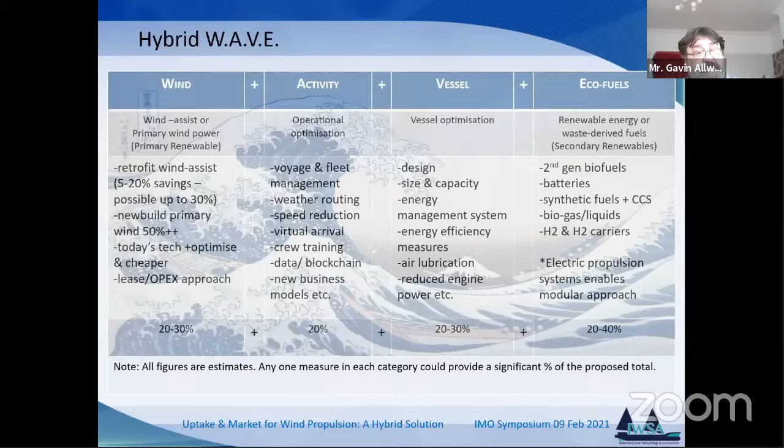We don't see wind as an energy efficiency measure. We see it as a propulsive energy provider. These three together, if we're looking at 20%, 20%, and 20%, which are probably conservative estimates, we can actually reduce that bunkering requirement down to, say, 40%. This would mean facilitating a quicker delivery of those fuels into the market and other systems.

I'm not going to go through the technology toolbox, but I just wanted you to be aware there's not just one type of wind propulsion. There are actually 7 different categories, 4 of which are developing quite quickly now. And you'll see in a slide later which ones are actually taking off.

Now, we do have the iron triangle challenge - time, money, quality. I'm sure you're all familiar with this. We're starting to break this iron triangle now. If we look at the technology which is coming online now, increasingly available, increasing with predictability and actually future-proofing your vessels. With money, if we take an OPEX approach rather than a heavy CapEx approach, we can actually see wind propulsion systems being leased onto vessels as opposed to the heavy CapEx approach.

However, if you do have that CapEx approach, ROI is around $600 per ton of fuel, then the ROIs start to come into that 3 to 4 year aspect, depending on the size of the rig. And of course, with the carbon approach, it's zero emissions. There are no external costs here. We don't externalize health, carbon impact, there is no eco footprint.

And then on quality, that's something that can never be compromised. And as you see, just one very quick point here is virtually all of the classification societies have now published their wind assist guidelines publicly.

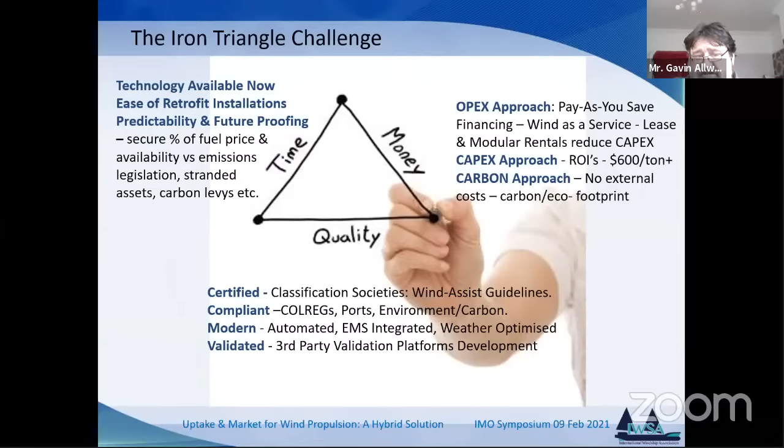That is growing too. The next question is, okay, so where are we going with this? Well, the existing pipeline of projects, and this is without any commercial contracts to date, we're looking at around 47, possibly more vessels by the end of 2022 into early 2023.

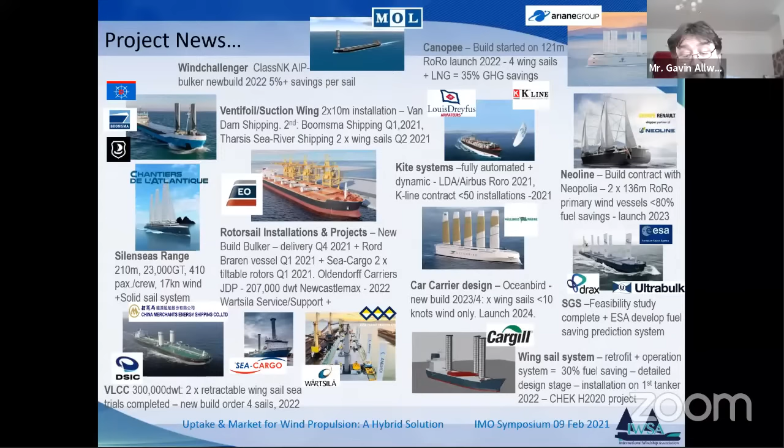These projects include some quite big names in shipping recently. For example, Oldendorff, Cargill is looking at wind propulsion at the moment. We've already heard from Mr. Peng Guishang about the VLCC that's been ordered with 4 sails included. So some really exciting news out there, and I'm more than happy to talk at length with anybody who's interested to learn more.

And IWSA itself is going to be developing, or is in the process of developing, an accelerator program to bring not just the best marketed technologies to market, but the best technologies. And if you'd like to know a little bit more, we actually have a wind propulsion forum in association with Royal Institution of Naval Architects.